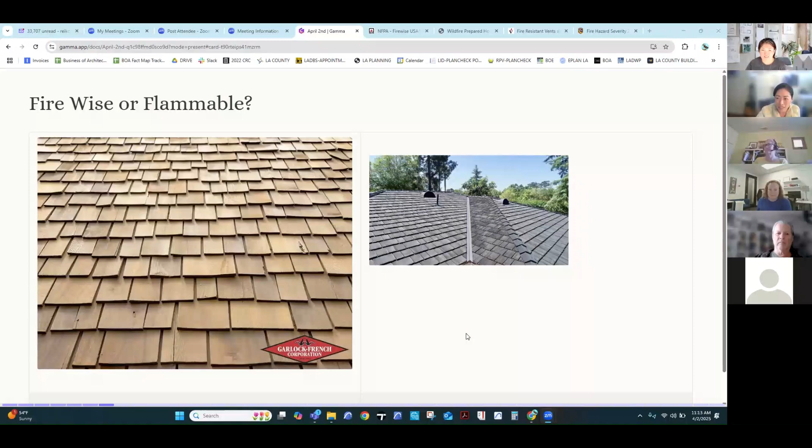So the answer is, let's go to the slide. The answer is the right one is Class A cement tile roofing, which is not flammable. The one on the left is just regular wood shingles, which are flammable wood shake. They are really pretty, and they are very common in the San Gabriel Valley area where I live, but that is highly flammable roofing material.

For roofing materials, they are classified as Class A, B, and C. For the fire areas, we would need to install Class A tile roofing. Class B and C can withstand moderate to light fire testing. Some examples for Class B and Class C would be flame retardant treated wood shakes, which are Class B, or just regular wood shakes like the one in this picture, which is Class C. For the fire zone, we would need to install Class A roofing, which would be asphalt shingle roof or composite roof, and also built-up roofing, clay tile roof, and standing seam metal roof.

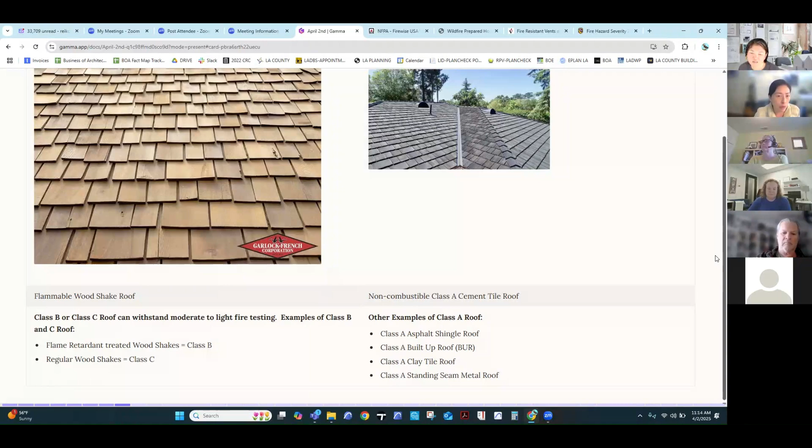So some of these are more like concrete tiles, lightweight concrete tiles, which in their specification would classify it as Class A, and it will also give you testing numbers to verify that these are non-combustible and are approvable by the jurisdiction for high fire zones. These are some of the things you need to look into when you want to replace your roof, when your house is in a fire zone.

So next, now we have wall coverings. We have a type on the left and a type on the right. Raise your hands or write in the chat if you feel like the one on the left is more combustible, or the one on the right is more combustible. I'll give you 2 seconds.

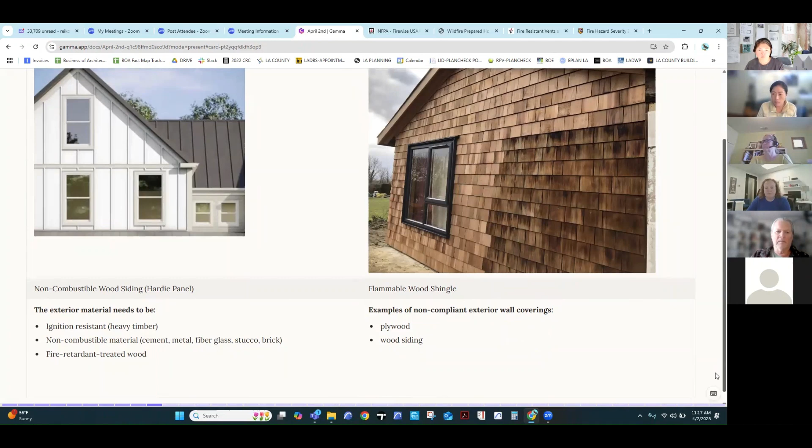Non-combustible material means the material itself just would not burn, like cement, metal, fiberglass, stucco, or brick. Those are all materials approved in the fire area. Things not approved in the fire area are things like flammable wood shingle, plywood, or wood siding. Those would be a big, huge no-no.

Next, eaves and under-eave areas. Let's see which one is flammable and which one is not. You can write in chat whether the left one is flammable or the right one is flammable. This one seems pretty obvious.

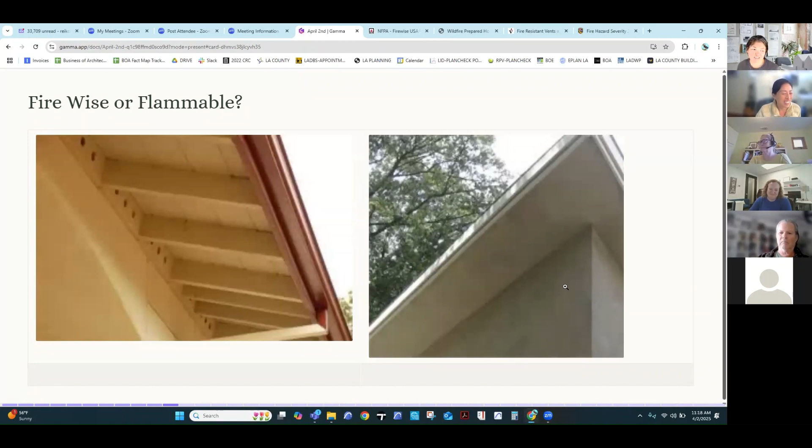Okay, so yes, it's very obvious. The one on the right is not flammable and the one on the left is. The left eave and rafter tails are a very traditional rafter tail and eave exposure that we see in most houses around here. They are usually the extension of the roof rafters, 2x4s or 2x6s, and then you see these holes for ventilation for the attic. This is very flammable, and embers, smoke, and ashes will just collect and go into the holes, and the attic will start catching on fire.

For fire zones, eave materials need to be non-combustible, and eave vents need to be 1/8 inch or smaller, so these holes for the vents will need to have a mesh covering them, with mesh holes 1/8 inch or smaller. Otherwise, we will need to have an eave like the one on the right side, which is a soffit eave with no eave vents.

The whole thing is boxed in. Usually they are boxed in not only with plywood, but also with a layer of 5/8 gypboard, and then finished with either Hardie board, or in this case, finished with stucco.

In the case that we do need eave vents, we will need to use the WUI approved eave vents. Let's open up the link. There it is - this sexy looking thing with honeycombs and mesh. This item, the Vulcan vent, comes in various versions for dormers, continuous soffits and vents, and gables.

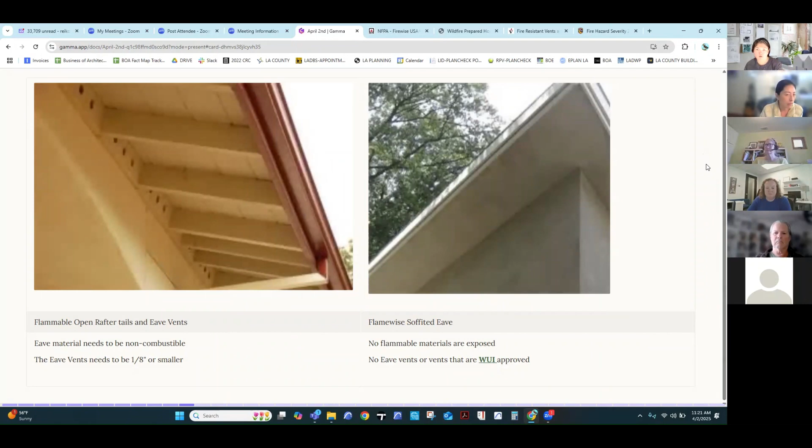You do have to figure out with an architect maybe what to do about your roof, because not every roof can do this where you can just not have any eave vents. So you do have to figure out how to do that.

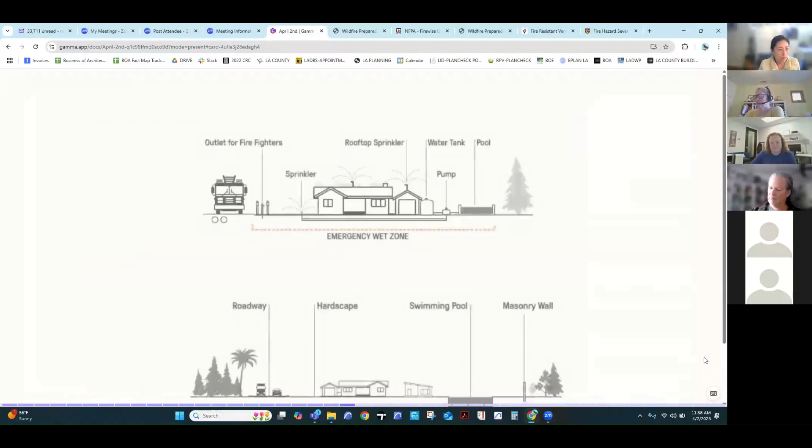So this next image shows some information about defensible space, a term a lot of the public is hearing right now in the news and in newspapers. Defensible space means creating areas around your property or even within your community to help stop the spread of fire should there be a wildfire.

This slide shows a couple of overarching ways in which we can address defensible space. The top one is the emergency wet zone. An example might be you live on a street with a lot of trees lining it, and maybe they're very large and ill kept, so it's reaching out to your community to ask that those trees remain maintained so that firefighters can get in and out easily, and of course those serve as fire breaks to stop the fire.

Sprinkler systems are another way to quickly add some water to your property if needed. And if you have a pool, getting a pump that you can actually use some of that water to wet your property if you need to.

The image below is talking about buffer zones. These are roadways, hardscape, pools, as we mentioned, even a masonry wall at the perimeter of your property, which can help slow down or stop low brush fires or wildfires coming through into your property.

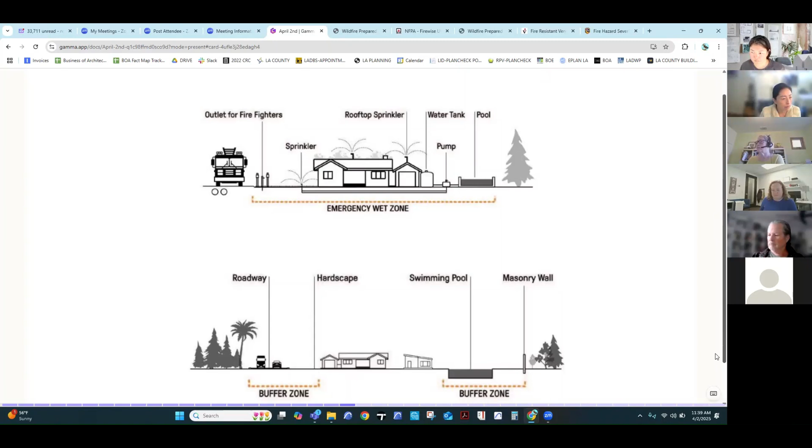So what are some easy fixes? Because some of us immediately might not be able to do big renovations on our home, but we're concerned. So what can we do right now to start making a difference and make our properties more safe?

I do want to mention it's very important, before you start taking out trees, to check with your local city ordinances, because you may need to get permits to remove trees. California does have several protected trees that require permits for removal when they are on your property, so that's something to pay attention to, because you don't want to get any fines.

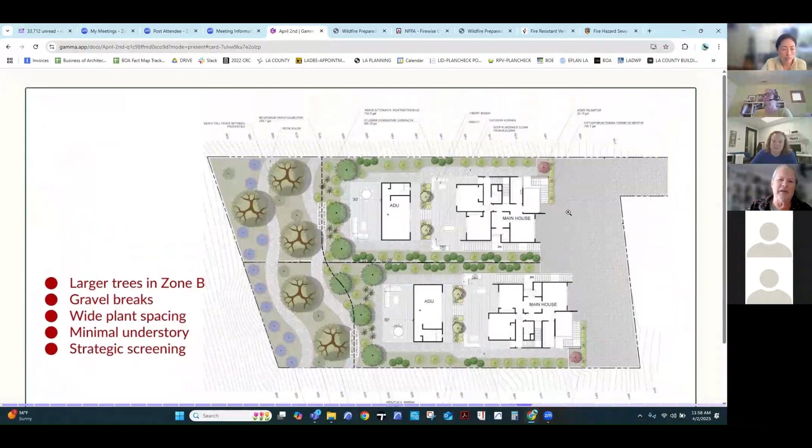You're talking about defensible space, right? Yeah, defensible space between the property line and the building face. And I'm wondering if that's being addressed in some of these diagrams. I think with the USGBC, I did have some questions about that too, because there was conflicting information about oak trees. So maybe, don't want to put you guys on the spot, but do you guys have a comment?

Well, if you're talking about defensible space in terms of planting, there have been, like you mentioned, some slightly conflicting things about oak trees. I think the important thing to remember is if the fire gets hot enough, anything can burn. But I've seen an article - I believe it was in the LA Times - about how oak trees actually, in some instances, acted as ember catchers. In some of the larger hillside areas and properties, they created a kind of screen that caught some of the embers and may have actually played a role in protecting some houses. But we've always followed the guidance of the Los Angeles County Fuel Modification Unit, and their recommendation is 30 feet is really the critical zone, where they're very particular about not having any larger trees such as oak trees within that 30 feet. 5 feet is what they call the ember zone, where they really don't want anything. But that first 30 feet is where they're saying keep the shrubs really small, they only allow particular trees.

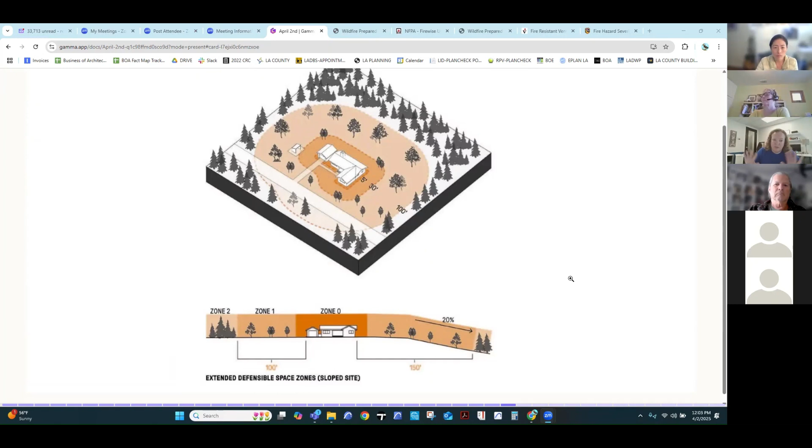So when we do projects in high fire zones in LA County, they typically go to the LA County Fire Department. Some cities have their own requirements, and we've done a couple in Orange County, which have their own fire and defensible space rules. They're similar, though I did one over there and there were slightly different requirements. But the overall theory I think is the same anywhere you go, because fire is fire.

Because I think the defensible space thing is from Cal Fire, right? That they're the ones that publish this. Yeah, there's a lot of overlap in guidelines. You'll see differences in terms of, some call it zone 1, some call it zone A, there's some different terminology floating around, but the best practices tend to overall be the same, which is keep the flammable things farther away from the house, et cetera.

And I know there's a lot of discussion going on in areas where there needs to be a lot of rebuilding happening, like changing what the setbacks are, giving people more space and not building so close to the property lines. And even getting communities to think differently about how the community's rebuilt, about creating more greenways in the form of bike paths and walking paths to weave in defensible space within the existing community that maybe didn't exist before.